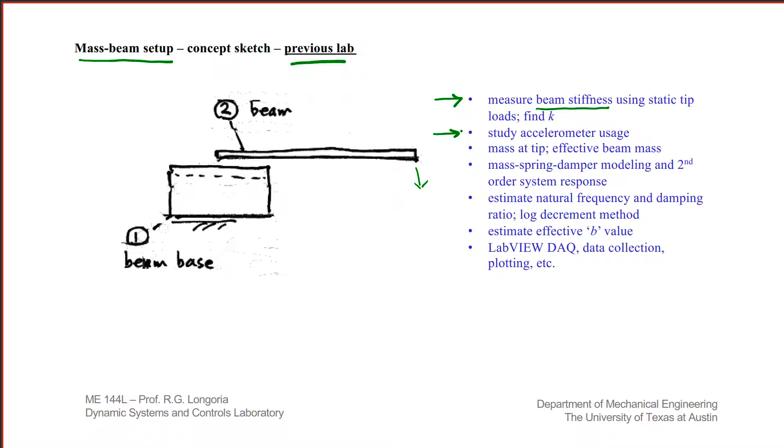In a previous lab using this simple mass beam setup, we focused on simple ways to measure the beam stiffness just by applying static loads on the tip of the beam. We also introduced accelerometer usage. We mounted an accelerometer right on the tip here, and that added some mass. So we had some mass located at the end of the beam, and we also looked at ways by using modeling techniques to estimate how much effective mass of the beam is included when you look at the response of the system.

This gave us an opportunity to study second order system response, so hopefully you have a better grasp of those principles, and you estimated the undamped natural frequency, and measured the damping ratio using an experimental log decrement method. From that, you were tasked with finding the effective B value. So in a sense, this is a simple system that allows you to study the concept of a mass spring damper system model that you're introduced to in many other courses. Another purpose of this lab was to give you more practice using LabVIEW, especially for data acquisition, plotting, and so on.

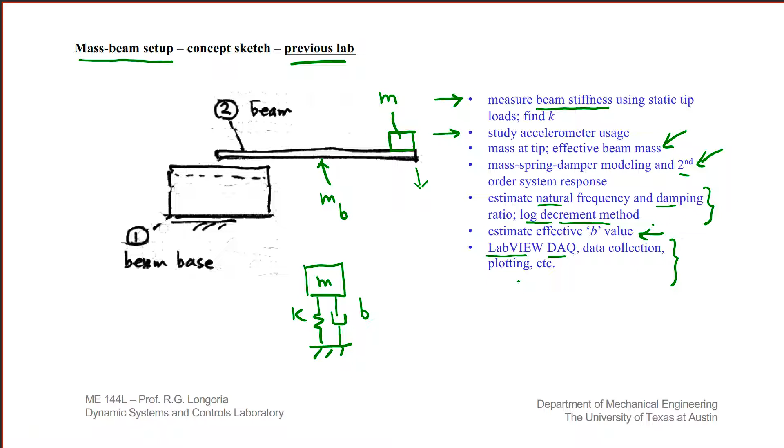We want to use that same setup in this coming lab. Now what we want to do is introduce force measurement and also characterization of a component. In this case, we're going to add a little air pot damper between the tip of this beam and attach it to this load cell through this little mounting plate. So this little tip here, as you'll see in a related video, can be screwed into this little plate, which attaches then to this load cell. And this load cell is fixed to a base plate that's then basically clamped down to the table.

So really, it's a similar system in the sense that it's a mass spring damper system. What we're doing by attaching the damper at the tip is effectively increasing the overall damping of the system. But because we're measuring the force at one end of this damper, and this is essentially a fixed end, we can directly measure the damping rather than relying on, say, the log decrement method to infer the B value using the damping ratio of the overall system.

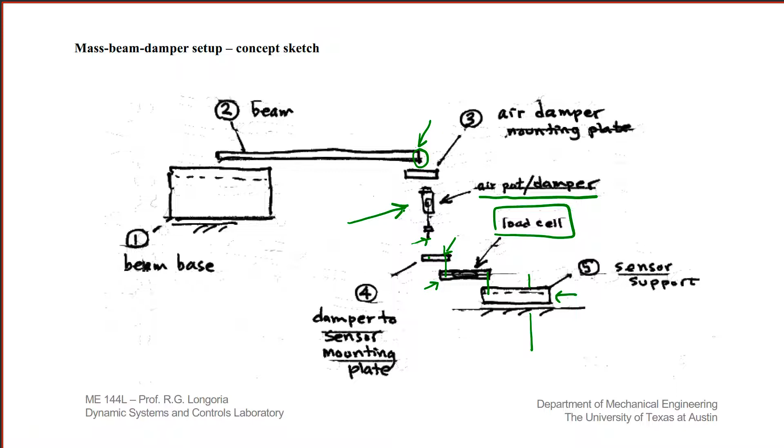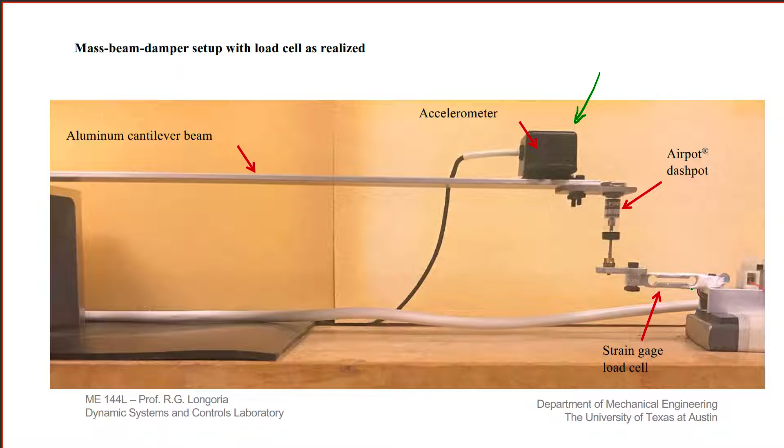So the overall goal of this lab then is to study it, and here you see it realized. We'll be mounting an accelerometer here to measure the acceleration and integrate the acceleration to get the velocity. Here's the air pot dash pot, and here's the strain gauge load cell. So what we want to do is study strain gauge principles and also signal processing techniques. Here's a detail of that setup for when you walk into the lab. You can see how that air pot damper is attached to the load cell here. Here's the accelerometer. There's an adjustment here where you can change the level of damping in that air pot dash pot damper.

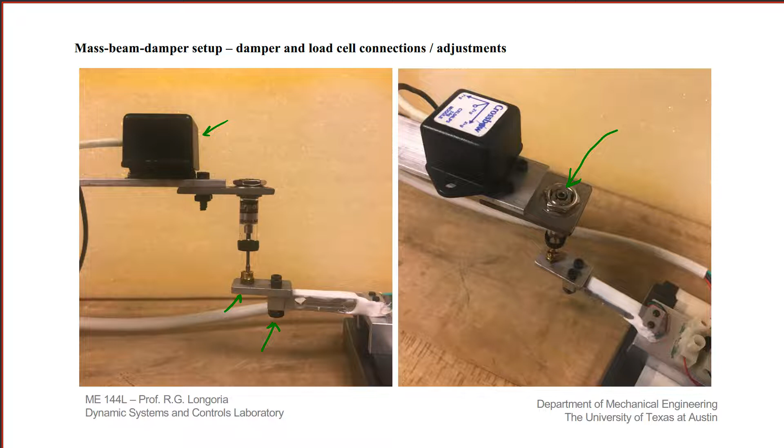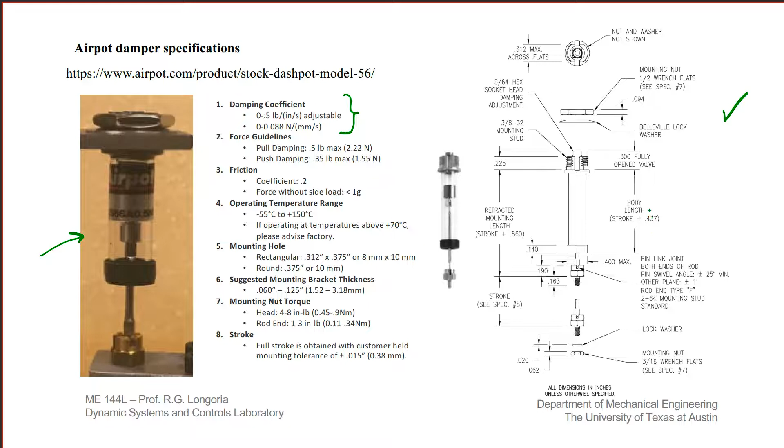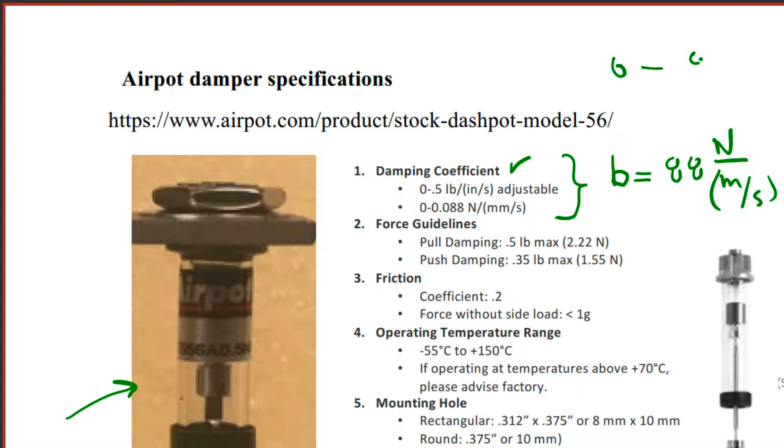And I've also included on these slides for you to go back and review the specifications. In particular, pay attention to the damping coefficient that the manufacturer provides for this small device. And here are the sizes for you to review. It's a small damper, so you can see it's only about half an inch, 3/4 of an inch in length. By giving you this damping coefficient, they imply that basically the B value is constant, and you can see that's 0.088 newtons per millimeter per second, or about 88 newtons per meter per second. Okay, so we're going to be measuring this directly in the lab, and so you can see that that damping value should be anywhere between 0 to 88 if you use SI units. There's some other parameters here, other specifications that you can review. There's friction in the sliding here, but that's very small. Okay.

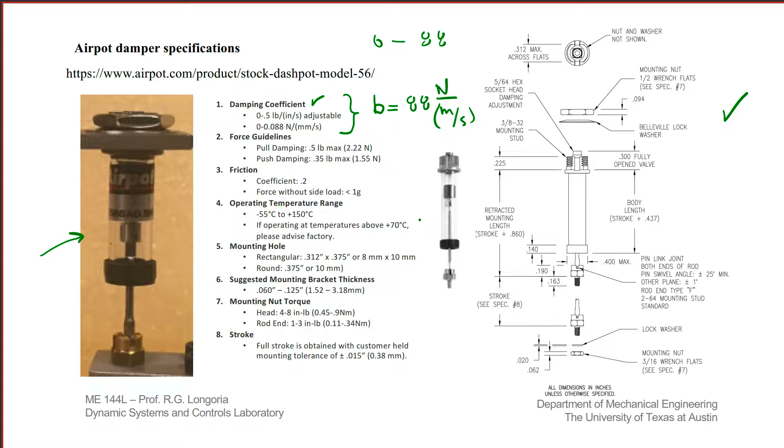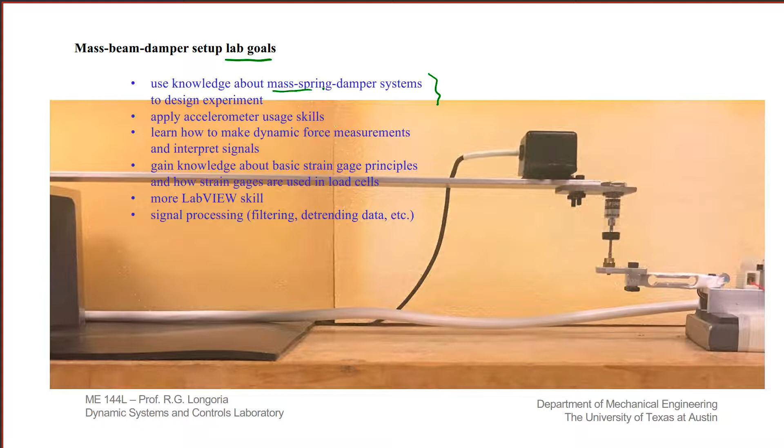In summary, here are some of the goals for this lab. Again, you want to use your knowledge of mass spring damper system models to understand the design of the experiment. You want to continue using an accelerometer, so improve your skill in the usage of that sensor. But in particular, what we want to focus on is learning how to make dynamic force measurements. So in a related video, I'll talk more about that, especially about strain gauge principles, which is something that I think all mechanical engineers should have a good understanding of, especially how they're used in load cells. So I'll talk about that again in a related video.

You're going to in the lab again increase your LabVIEW skills and also be introduced to some signal processing techniques, filtering, detrending the data. Since your acceleration is going to be integrated, you tend to get a trend in that signal when it is integrated into velocity, and so you'll be talking about that in the lab and how to get rid of that trend.